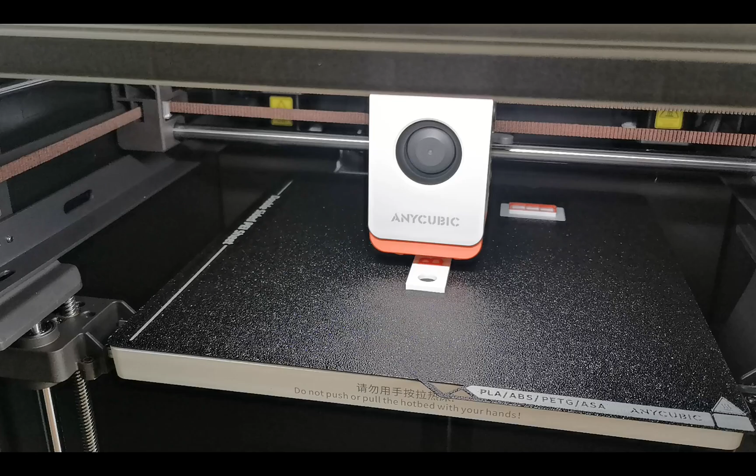We're going to learn how to use Blender to create a multicolor 3D print. We're teaching this from a beginner's perspective with virtually zero knowledge. You'll use Blender to create this key ring and also learn how to split this in your slicer and create the 3D printed output. So let's have a look how we will do this.

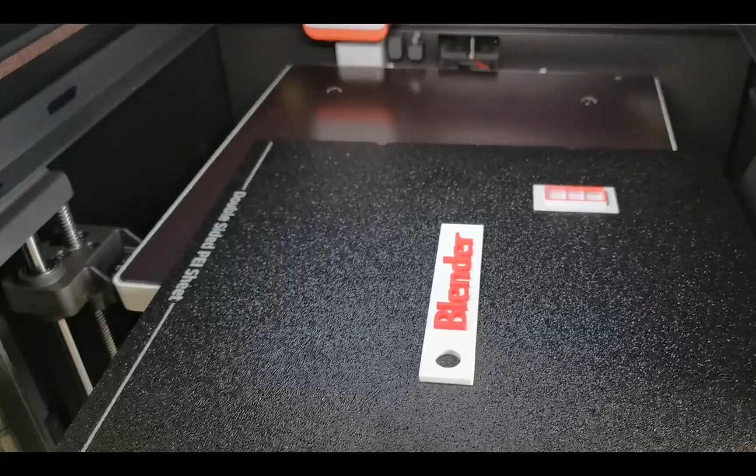So I've already opened Blender and we got the default cube in the middle. To start the project, we're going to change the unit scale to millimeters. If I click on the cube and look to the right, we can access the flyout bar by this arrow here, or by pressing N on the keyboard to open and close the flyout bar. If we look at the dimensions, we see the X, Y, and Z dimensions are 2 meters.

Let's change this by going to the Scene tab and coming into the units. We open that up, we can see the unit system is set to metric at the moment. Yours might be set to none. Just set this to metric and then we can look down for the length. At the moment it's meters. Let's change this to millimeters. If we look back to our cube, we can see the dimensions has changed. We have now 2000 millimeters.

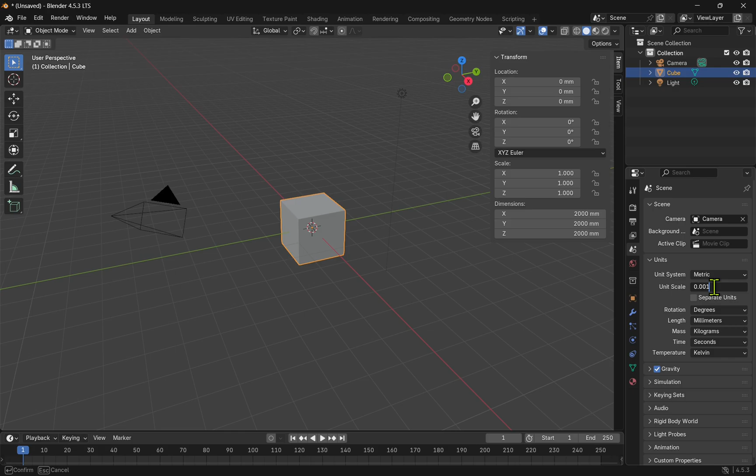We need to set the unit scale, and for millimeters, we just change this by 0.001. This divides the default Blender unit, which is 1 meter, by 1000, effectively making it equal to 1 millimeter. Let's hit enter. There are some other settings that we can change, but this is sufficient for this project. Dimensions now are 2 millimeters.

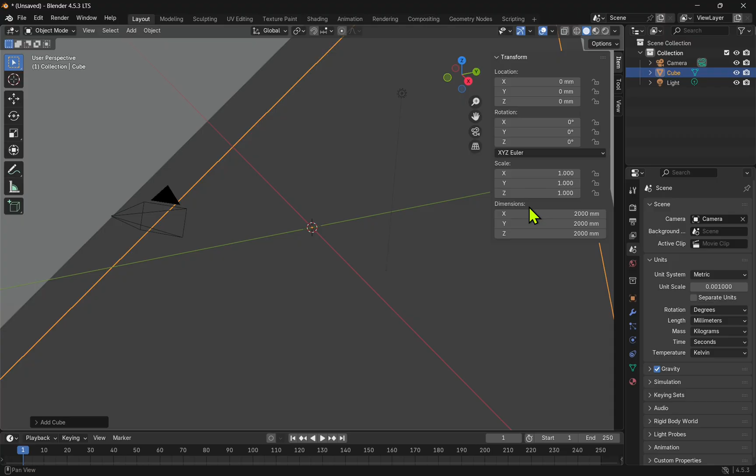If we don't have this cube, let's say if we click on it, right click and hit delete, then we can add it. Come up to add, come to mesh and select cube. Dimensions of the cube are 2000 millimeters at the moment. So I'm just going to change this to 2. Now we have our base shape.

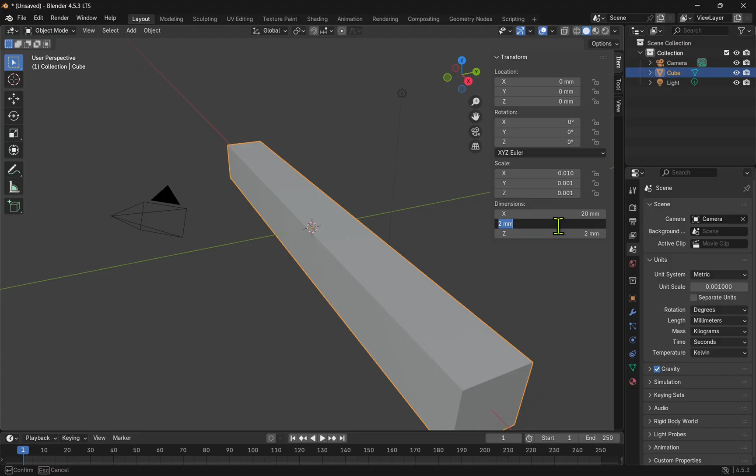Let's add the dimensions for our nameplate. The cube is selected. I can change the dimensions. The X I'm going to change to 20. The Y I'm changing to 100. And the Z I'm changing to 3. We'll just hit enter. Now I can zoom out. I'm going to use the icon up here and we have the basis for our keychain.

For 3D printing, it helps to position the model so it sits directly on the build plate. For this, we'll set the Z location to half the height of the object. We don't have to do this. It can be adjusted in our slicer, but this just simplifies our modeling.

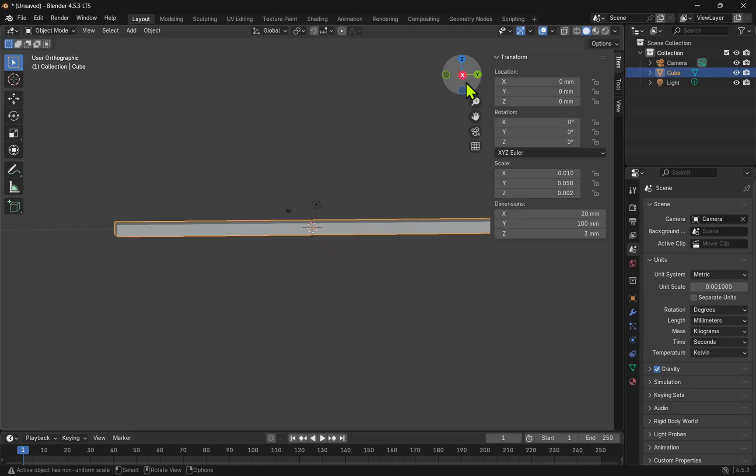I'm going to look straight ahead on the X-axis. The Y determines the base of where this is going to be. If we make sure a rectangle is selected and look to the right, we have the X, Y, and Z location. Now we need to set the Z to half the height, 1.5 millimeters. And we just click in another field. And we see that this has moved upwards.

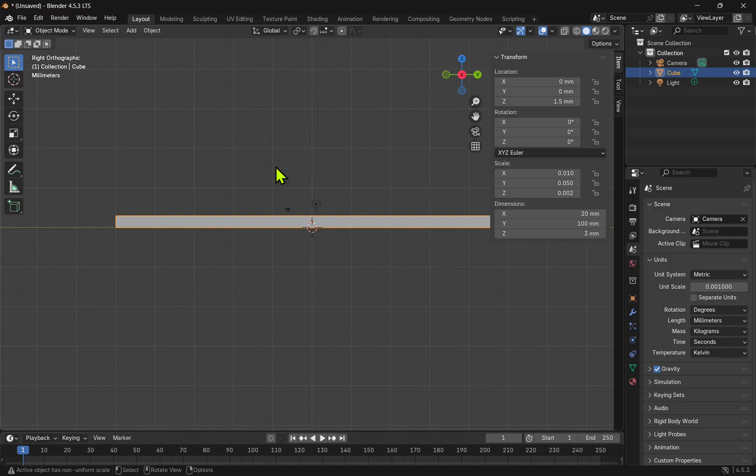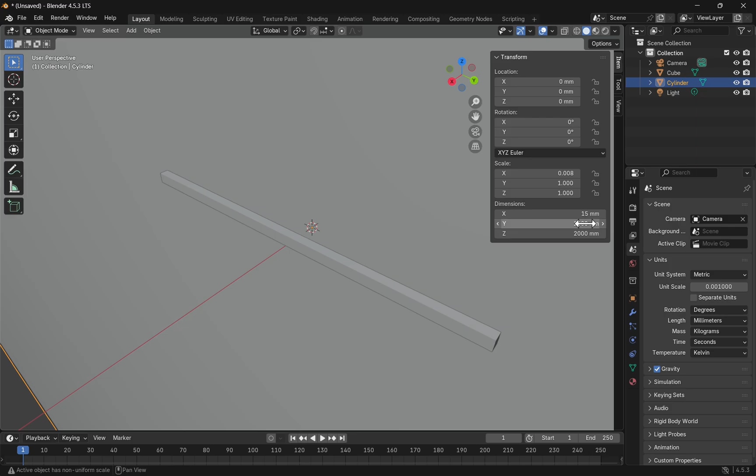Let's angle our view. And now we can add the hole. To do this, we're going to add another mesh. Come up to add, come to mesh, and select cylinder. The cylinder has come in at 2000 millimeters. Let's set the dimensions to around about 15 millimeters for each of the X, Y, and Z.

Now let's move the cylinder to the left to around about here. I'm going to use the move tool. Click on that. By selecting one of these arrows, click and hold and move this into position. Notice the Y moves here, so we can be a bit more accurate. Let's say -35.

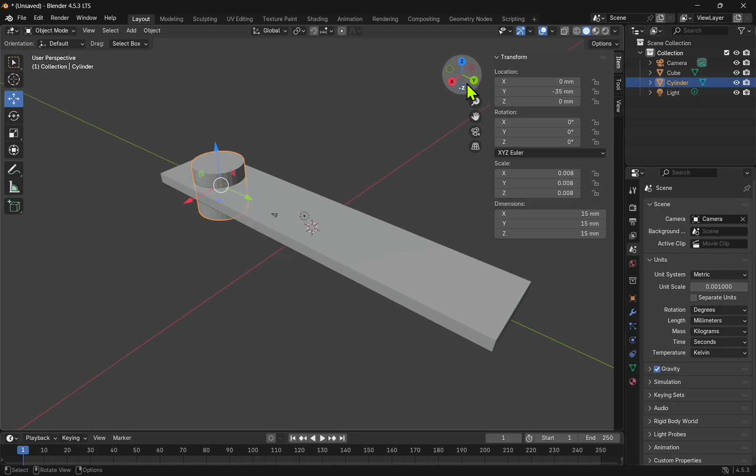Once we're happy with the position, we can add something called a boolean modifier to remove this cylinder from this shape. Note that the cylinder protrudes out the top and bottom. When this is removed from the rectangle, it will leave a hole. I'm going to add the boolean modifier to the rectangle. This is the one I want to affect.

We select the rectangle, come over to the right hand side, and you'll see a spanner or a wrench icon. If we click on that, we can add a modifier. When we add a modifier, come down to generate and come over to boolean. In the modifiers, we see the boolean modifier has been added. It's automatically set to difference and we need an object to remove.

We come into the object, select the eyedropper, and then select the cylinder. We can see it's saying object cylinder. We click that, cylinder gets added to the object. Also, if we drop this down, we can select it from the drop down.

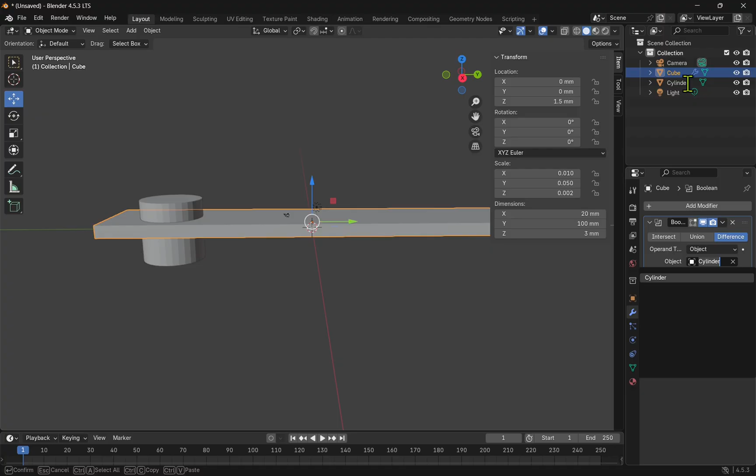At the moment, it doesn't look like anything's happened. This is because the cylinder is still visible. If we hide the cylinder by clicking on the eye icon, we now see a hole has been added to our rectangle. The modifier hasn't been applied yet.

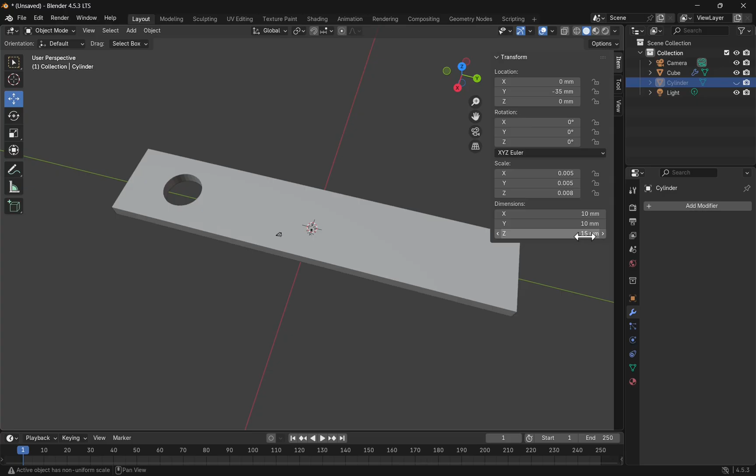We can still make modifications to it. For instance, if I come into the cylinder and look at the dimensions and set this to 10, we can modify the hole and also change its location. We'll apply the modifiers at the end.

Next, we're going to add the text. Come out to add and come down to text. The text has been added, but it's extremely small at the moment. Let's change the dimensions and set the X to 20, the Y to 20, and we'll leave the Z as it is.

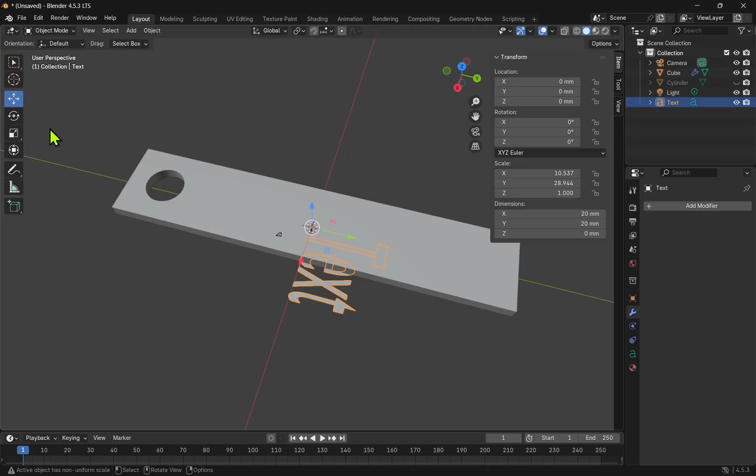At the moment, the text is round the wrong way. So let's come over to the tool on the left, the rotate tool, and rotate it along the Z by click and dragging.

If I hold down the Control key, I have different options for my rotate. Here I can snap to intervals. Once I'm happy, just release and our text is in position.

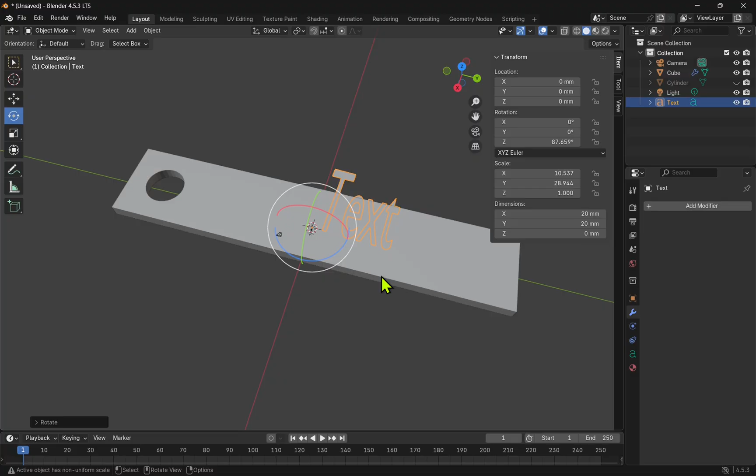Next, I can move the text to the position I want. I'm going to scale this further later.

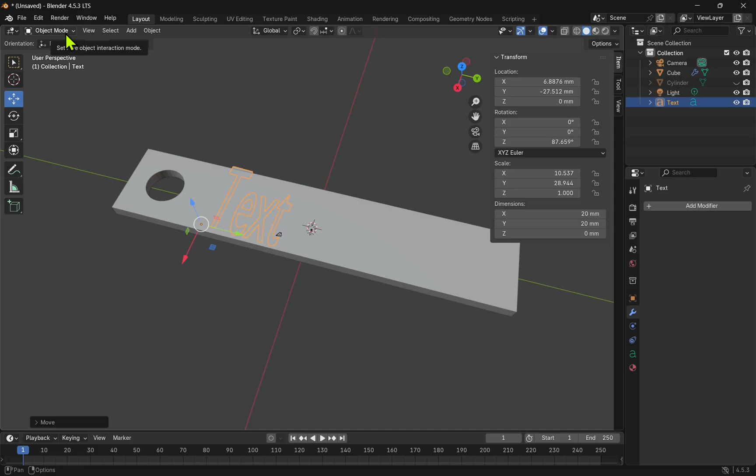Let's edit our text. To do this, we need to be in edit mode. If we come to the top, we see we're in object mode. If I drop this down, we can select edit mode. Here I can start typing the text, and I'm just going to add the words Blender.

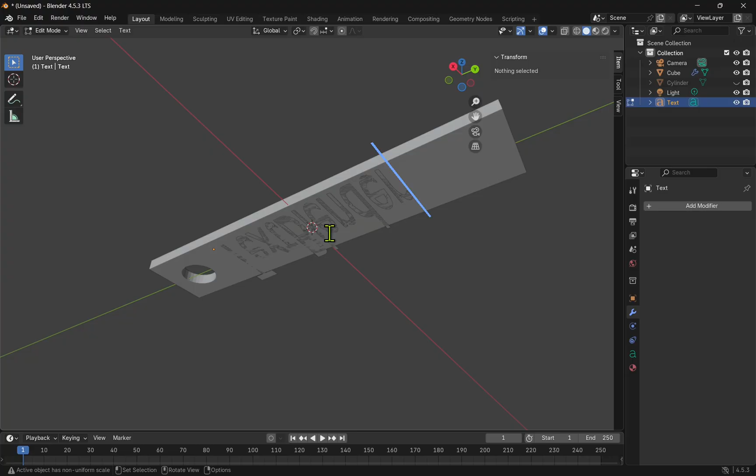The text itself is underneath, as you can see here, so we may want to move this before we start typing. Let's come out of edit mode and back into object mode. Select the move tool.

We can set its location. Let's just pull this up. We're aiming for the text to be on top of the base, so we need to set the Z position to the height of the base.

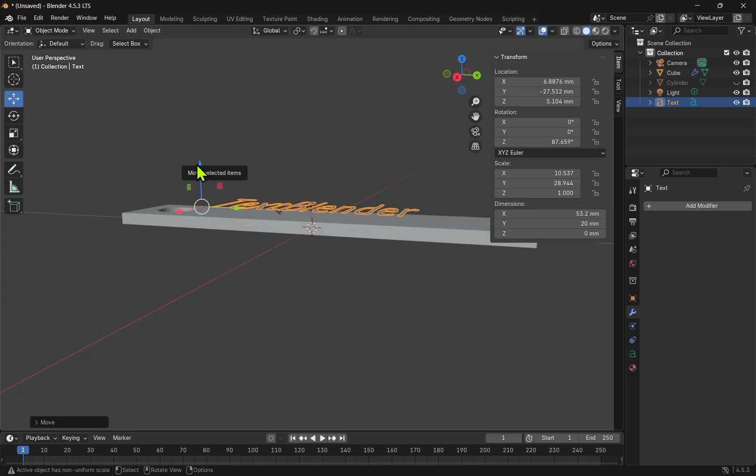If we go further, we're going to get an error in the slicer because both parts will be disconnected. So let's set the Z location to 3, the same height as the rectangle.

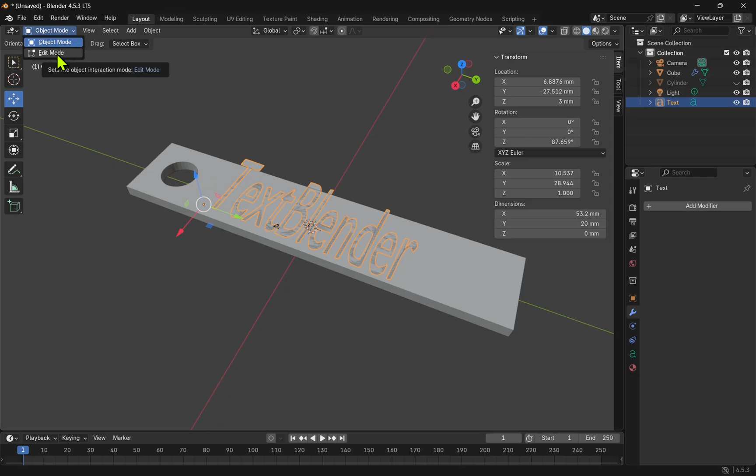Because we haven't converted this to a mesh yet, we can go back into edit mode when the text is selected and edit the text. Coming out of edit mode, back to object mode, allows us to move and scale the text.

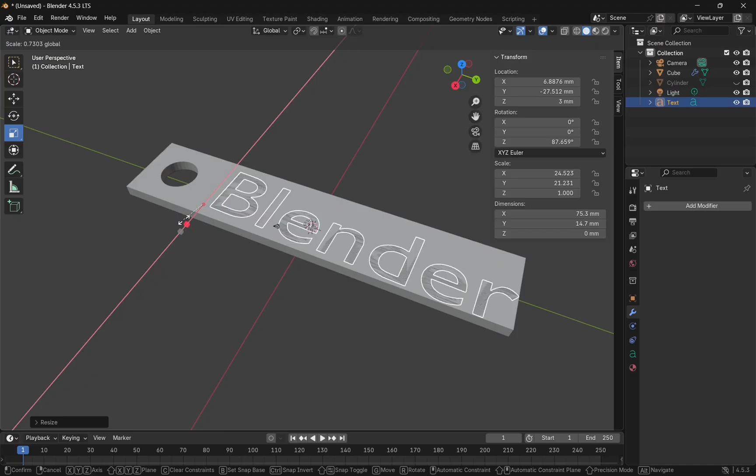So let's use the scale, and we'll scale this into position using the draggers either side. I can use the transform tool, and let's look down from the Z. This gives me multiple options, so I can adjust the rotation, the position, and the scale.

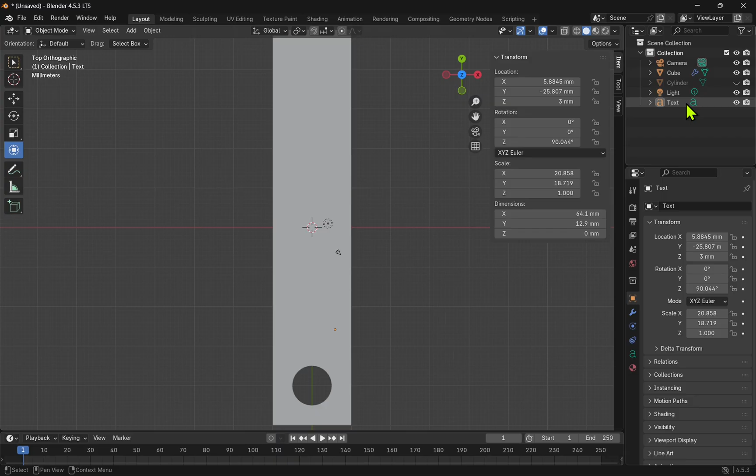Once I'm happy, I can convert this to a mesh. First of all, we must make sure it's selected. If we can't see it, we select it from the panel. Notice the icon shows text.

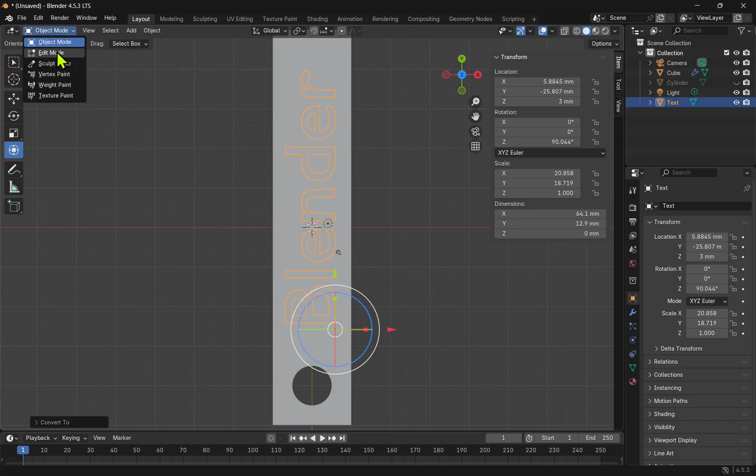Let's convert this object, convert to a mesh. On the right hand side now, we can see it's a mesh. This means that we can come over into edit mode, drop this down into edit mode. We can select all of the mesh by hitting A on the keyboard or coming up to select and selecting all.

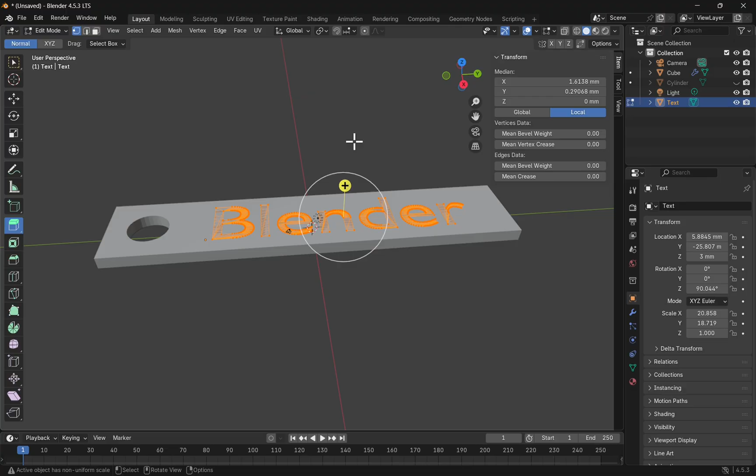And if we look to the left hand side here, we have the extrude region. If I click that, this allows me to extrude. So I'm going to look from the X. I'm going to click on the plus sign and bring this up to extrude.

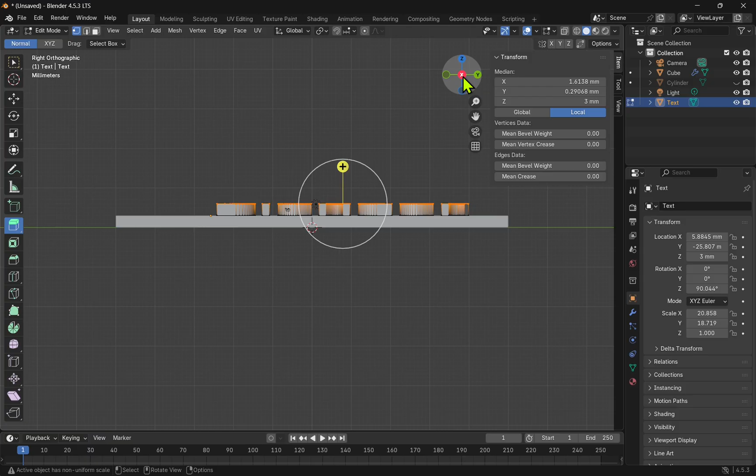See on the right hand side, that's showing the extrusion here. So we can change this, let's say to about 3, and hit enter. Once we're happy, we can come out of edit mode to object mode.

We'll just click off. We can see we have the base plate and the text. These are two separate objects at the moment. Look to the right hand side here, we have the cube or the base plate and the text. And for multicolor printing, this is what you need.

If I fuse these together with a boolean, we won't be able to separate them in our slicer. I'm going to hide the camera and the light, so we just have the text and the cube visible.

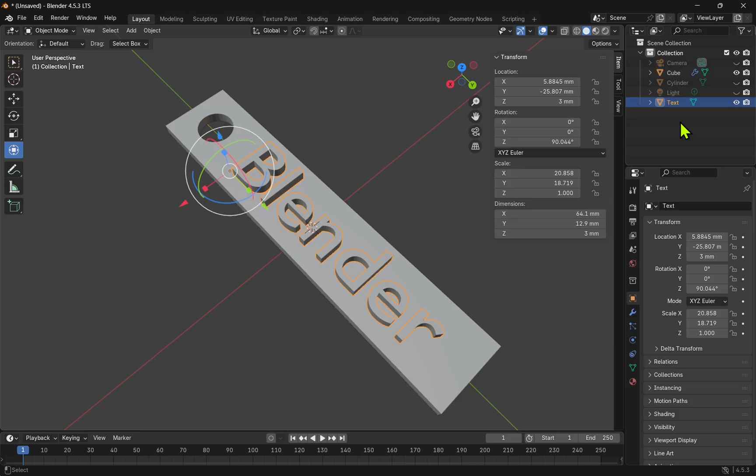We can save our project using Ctrl S or File Save. And now I can export this for 3D printing. Remember, they're not connected. Let's come up to File and Export.

I'm going to pick STL, and this will export the visible objects, so the text and the cube. The Apply Modifiers is checked. So remember, we added the cylinder and used a boolean operation. This will apply that modifier to it.

Next, we select Export STL, and we've exported our project ready for 3D printing.

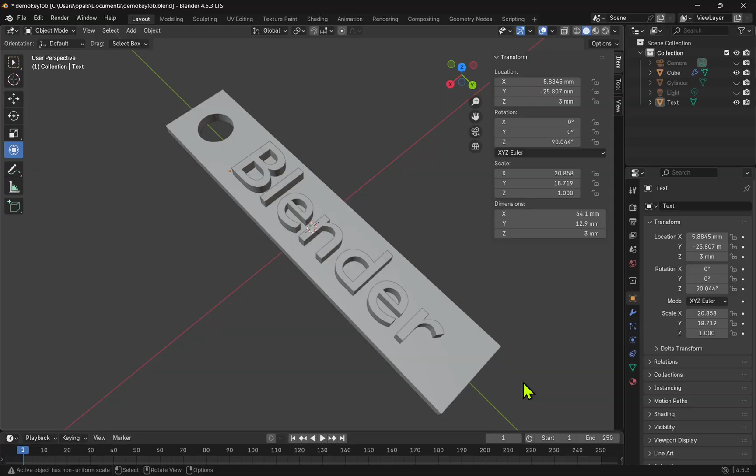I'm now going to load my project into the slicer, assign the colors, and then produce a 3D print. I'm using the Anycubic Slicer next, but this will be a similar process for the slicer that you'll be using. Let's create a new project.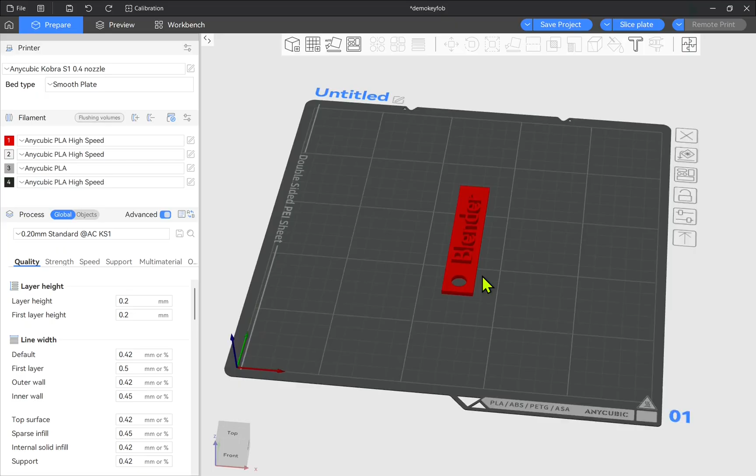Go to File, Import, and import my file. Select the STL, and the STL has been added. First of all, let's check to make sure that's sitting on our plate. If not, there are tools to position it.

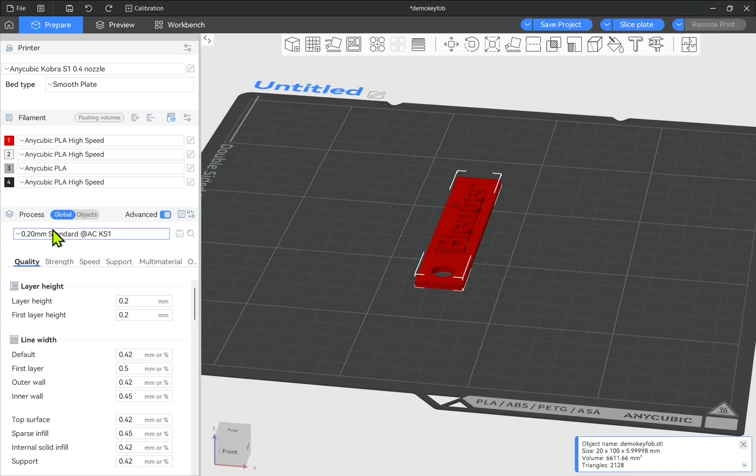And now let's assign the colors. Select our model, and then right click, and there should be an option like split. I'm going to pick split to parts. On the left hand side, we see we have global and objects. We can see it's been split down to the individual objects.

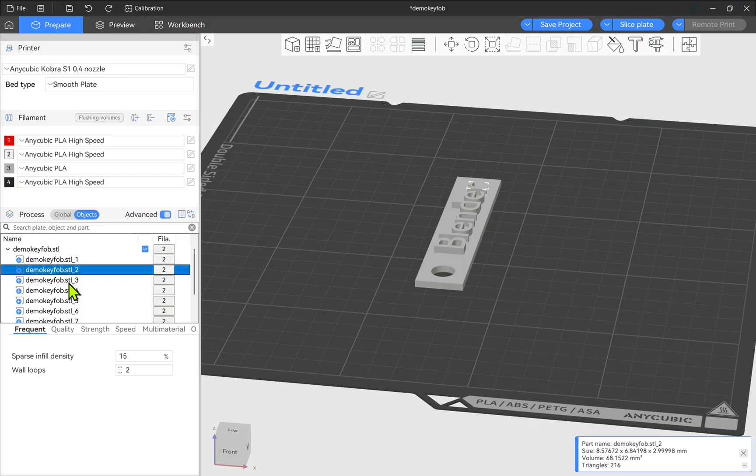One for each letter. The overall color, I'm going to right click, change filament, and set that to white. And then I'm going to pick all of the letters, holding down Shift or Control if they're not linear positioned. Then I'm going to right click, set filament for selected, and we'll select red.

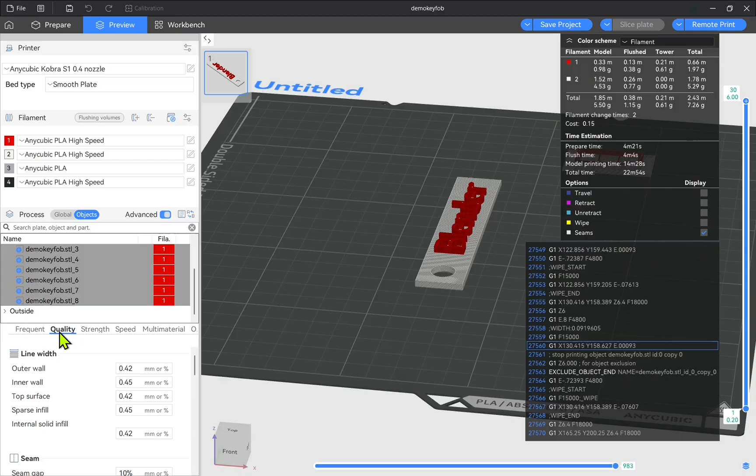I can now slice, and it's now ready for 3D printing. Remember, we can adjust quality, strength, and speed to speed up our prints. We can now send it to our printer and start the print.

And we have the finished result. This tutorial has taken you from the beginning to the end for a very simple multicolored print. I hope you enjoyed that video, and I hope to see you in the next one.